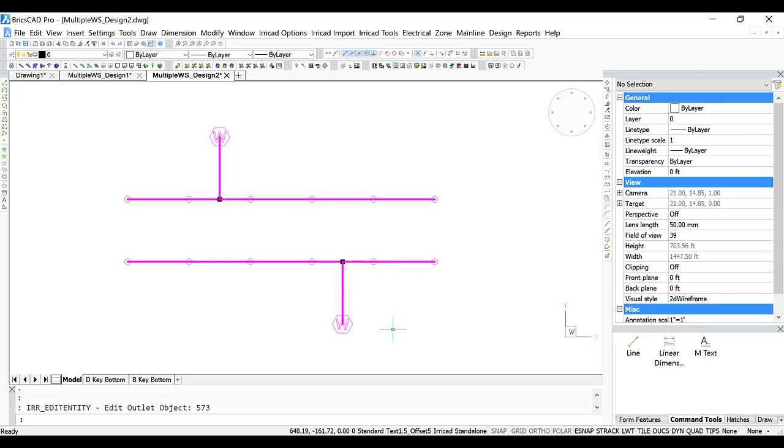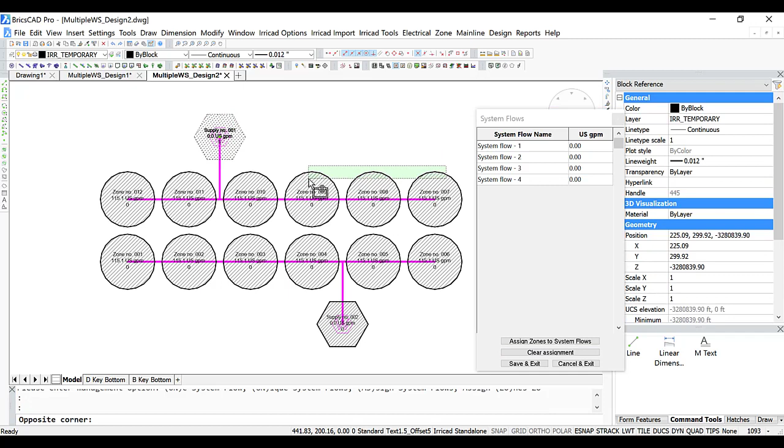So we'll design this one way and look at the results. So let's set up the system flows, and we will choose 4 system flows. And we will have 2 system flows for each water supply. This water supply and these 3 guns or valves we will assign to system flow 1. The water supply and these 3 will go to system flow 2.

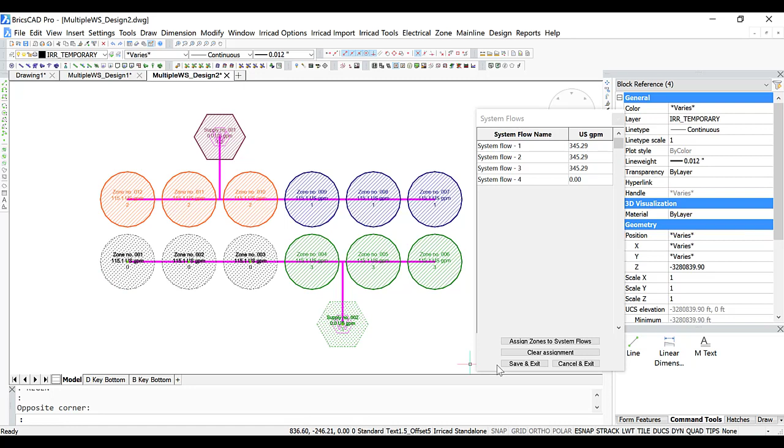In the bottom section, this water supply and these 3 will go in system flow 3. And again, this water supply and these 3 will go in system flow 4. So we have 4 system flows, and each water supply is fairly independent. Let's run through the design. And we've sized the pipes, and we can look at the reports. And we see that the flow for each system flow is 345 gallons a minute, and the pressure required is about 66 psi.

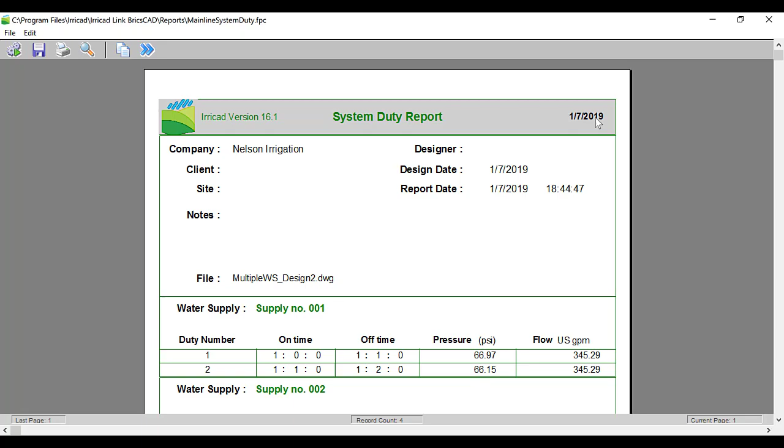The significance of this particular layout is that the water supplies are not shared to all 12 big guns. The top water supply supplies water to 2 system flows, 3 guns each, and the bottom water supply supplies water to 2 system flows, 3 guns each, and they are not mixed. These guns here do not receive water from both system flows. So the systems are independent, and we can design them as normal. Let's see what happens if we connect these systems and share flows from the water supplies.

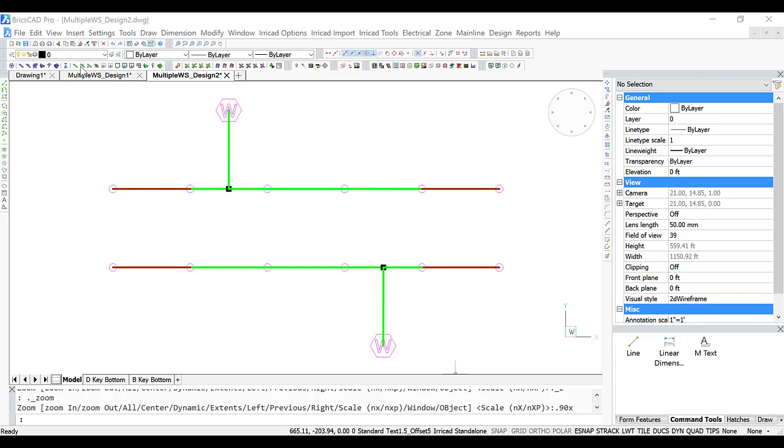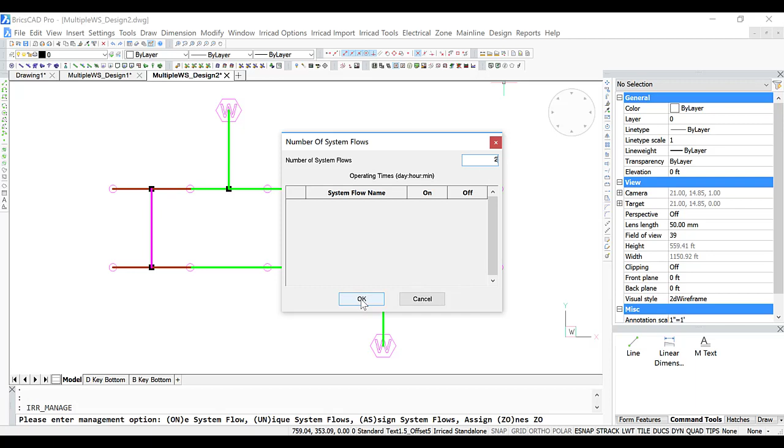We had 2 water supplies working 3 guns each at the same time. So now we're going to clear management and set up the management so that we have 6 guns running in 2 system flows. So this water supply and this water supply will operate these 3 big guns and these 3 big guns on system flow 1 with a flow of about 690 gallons a minute.

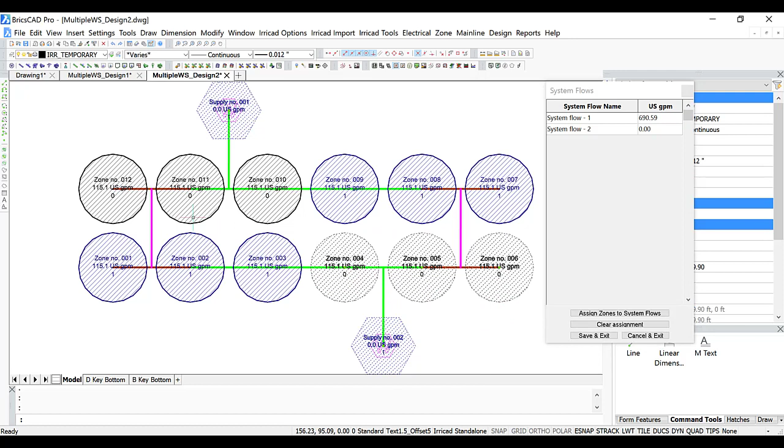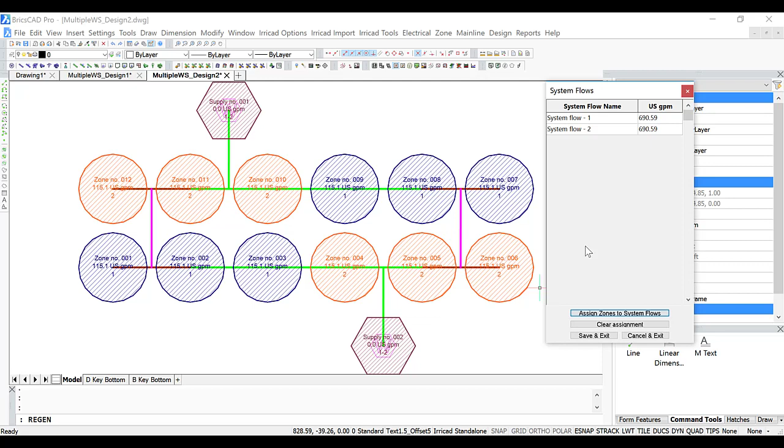Both water supplies again will supply flow to these 6 guns, and that will be system flow 2. So we have a mixture of guns and water supplies feeding into the same system flows. Let's design it and see what happens. We get an error saying that we can't do it because pressures haven't been entered for the water supplies. And that's what happens when we have this type of system.

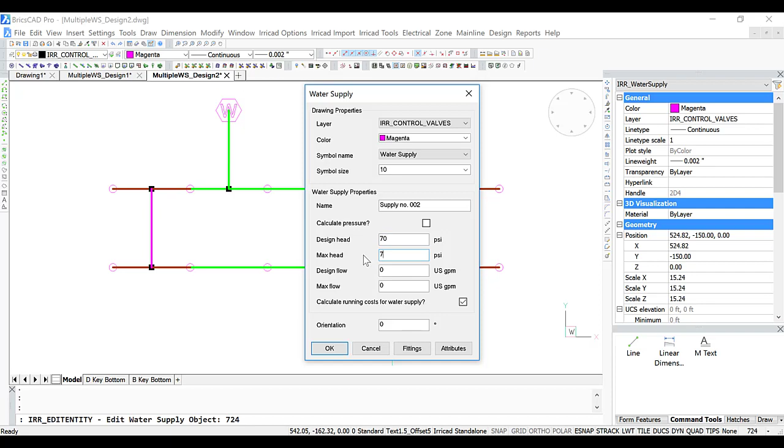So what we need to do is remove the calculate pressure check on the water supply and put a pressure in here, let's say 70 psi in both options. And we will do the same for the bottom water supply. Remove the calculate pressure check and fix the pressure at 70 psi. Now let's design the system and see how it goes. So now it has been designed.

We can look at the reports. And we can see that each water supply is supplying flow to each system flow. The pressure has been fixed at 70 psi, and this is the flow from each water supply going into that system.

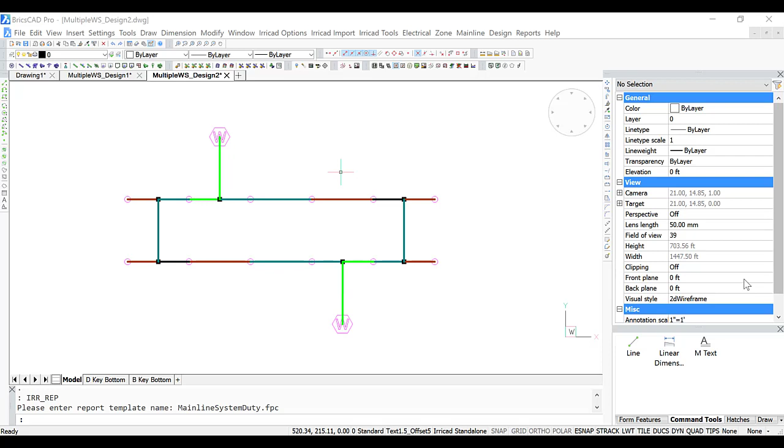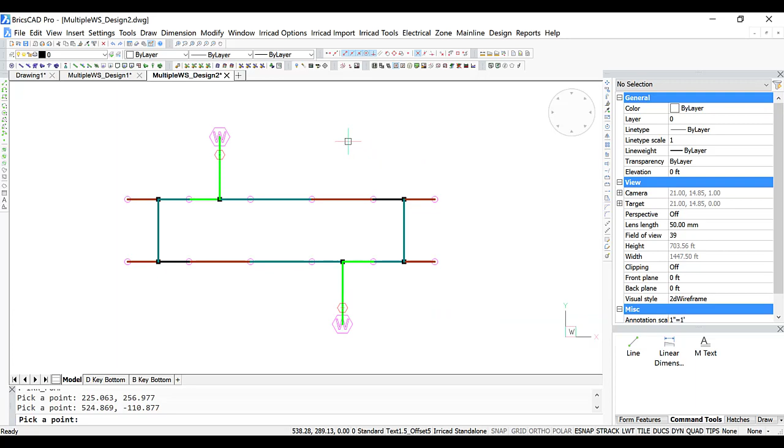We'll try one more variation on this particular system, and we will put pumps in line just downstream of water supplies. So under the mainline menu we have pumps, and there is one that is approximately 350 gallons a minute at 70 psi, and we will put one downstream of this water supply and downstream of this water supply. And we will also change the pressure at the water supply, let's say to -3 psi. So for example, the pump is pulling water out of a canal, and the same here.

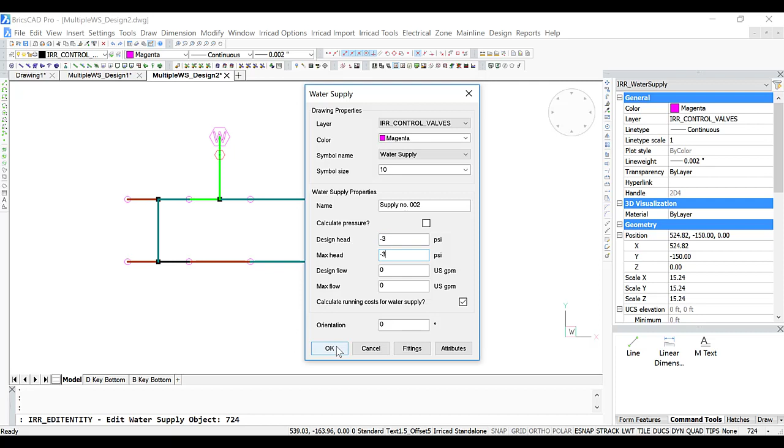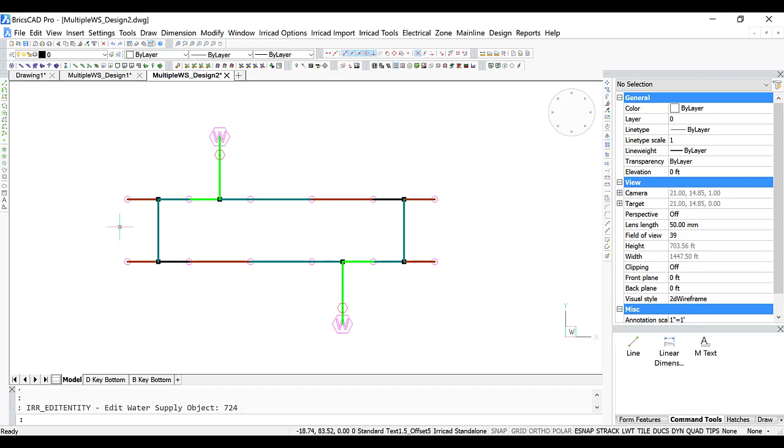So in this example we have a water supply with -3 psi going into a pump, which is going to boost the pressure, and the same thing is happening here. According to the database, the pump curve exists in the database, and IRRICAD is forced to follow that pump curve. Each of these big guns is a nozzle and has a curve of flow versus pressure. So in this example, we're going to generate a system duty report. We will run the design once more.

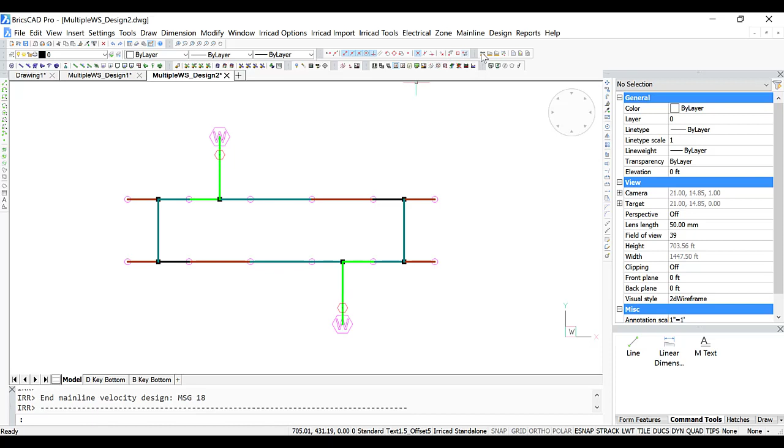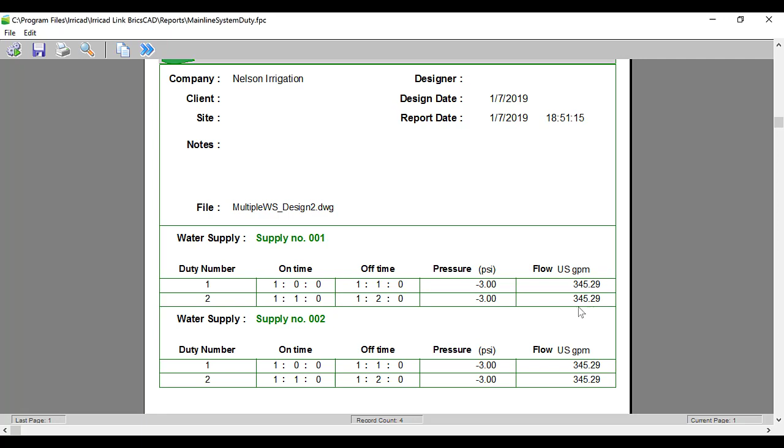We will get some warnings to make sure that we haven't placed those pumps within a loop. And we have some negative pressure pipe warnings for those sections of pipe in here, but we know that's probably going to be a vertical section of pipe. And now when we look at the reports, mainline design reports and system duty report, we see that we have -3 psi and a flow of 345 gallons a minute. And for system duty 2, again, both pumps are putting in the same amount.

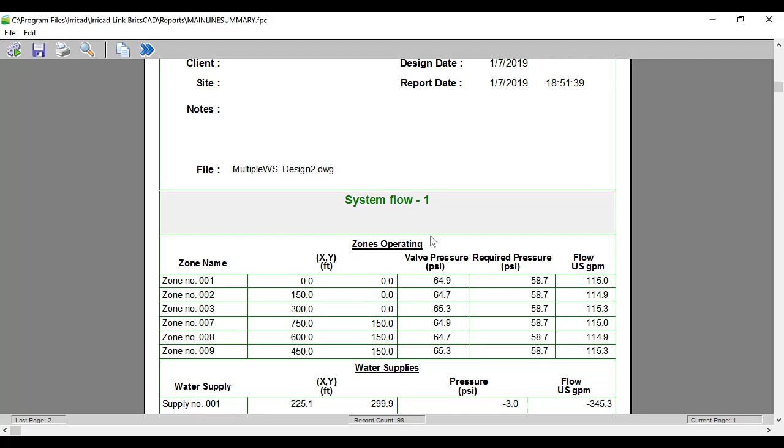So that gives you some examples on how water supplies can be used when you have more than one, and what pumps can do for you to add a pump curve and system flow curve into the design.